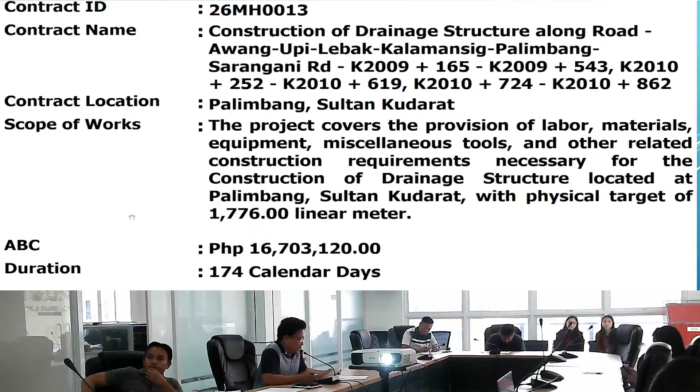So we have 8 civil works projects for this pre-bid conference. For the first project, the contract ID number 26MH0013, construction of drainage structure along road Awang Upi Lebak Kalamansig Palimbang Sarangani Road, with an ABC of 16,703,120 pesos.

The next is contract ID 26MH0032, widening of bridge Wal Br 1 along Awang Upi Lebak Kalamansig Palimbang Sarangani Road, location Palimbang, Sultan Kudarat, with an ABC of 14,108,080 pesos.

And the next is contract ID 26MH0034, construction of concrete road Basak Villamonte Capilan connecting to New Calinog in support of the bamboo and coffee plantation, location Lebak, Sultan Kudarat, with an ABC of 27,881,980 pesos.

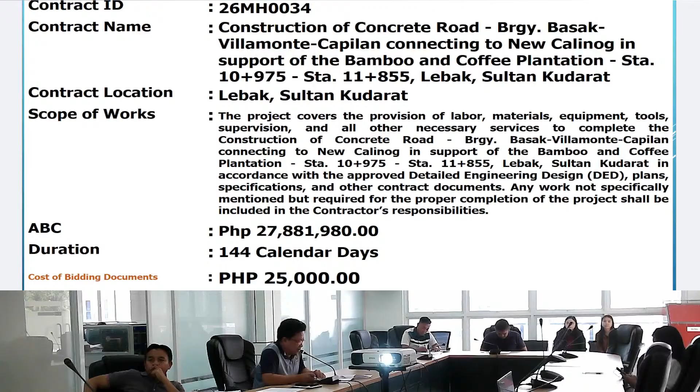For the next project is 26MH0070, rehabilitation of multipurpose building, Esperanza National High School, Barangay Poblacion, Esperanza, Sultan Kudarat. Location, Esperanza, Sultan Kudarat, with an ABC of 4,950,000 pesos.

And the next is contract ID 26MH0089, construction or completion of multipurpose building, Barangay Salansang, Lebak, Sultan Kudarat. Location, Lebak, Sultan Kudarat, with an ABC of 2,970,000 pesos.

And for the next project is contract ID 26MH0091, construction completion phase 2 of multipurpose building, Barangay Sison, Bagumbayan, Sultan Kudarat. Location, Bagumbayan, Sultan Kudarat, with an ABC of 1,980,000 pesos.

And the next project is contract ID 26MH0104, construction of multipurpose building, Barangay Kraan, Palimbang, Sultan Kudarat. Location, Palimbang, Sultan Kudarat, with an ABC of 4,950,000 pesos.

And the last project is contract ID 26MH0107, construction of multipurpose building, Barangay Malatunol, Palimbang, Sultan Kudarat. Location, Palimbang, with an ABC of 4,950,000 pesos.

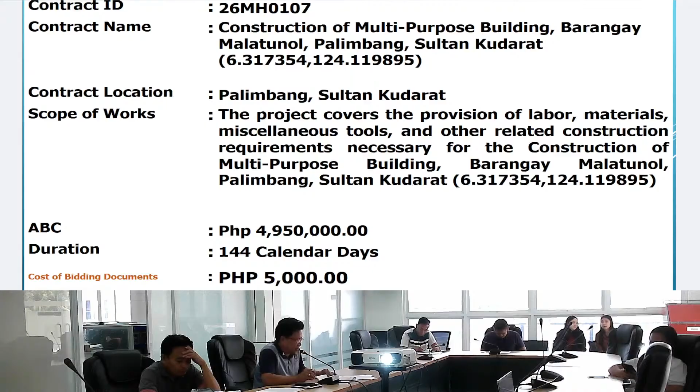So now I will give the floor to our planning engineers for the contract data as well as the discussion of plans.

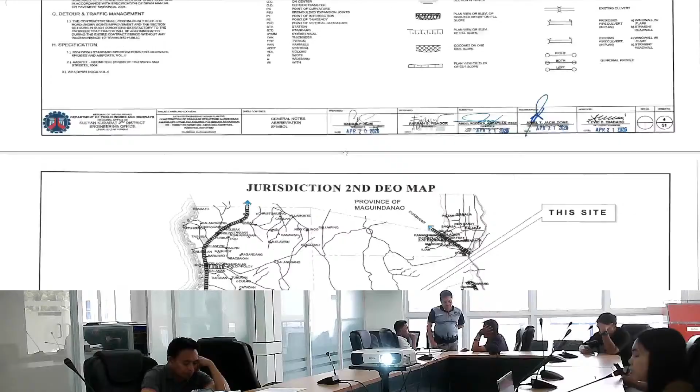For the summary of quantities: clearing and grubbing, we have 3.56 hectares. For the individual removal of trees with 150 to 300 millimeters diameter small, we have 7 each. For 301 to 500 millimeters diameter small, we have 4 each. For the removal of structures or obstruction concrete, we have 117 cubic meters.

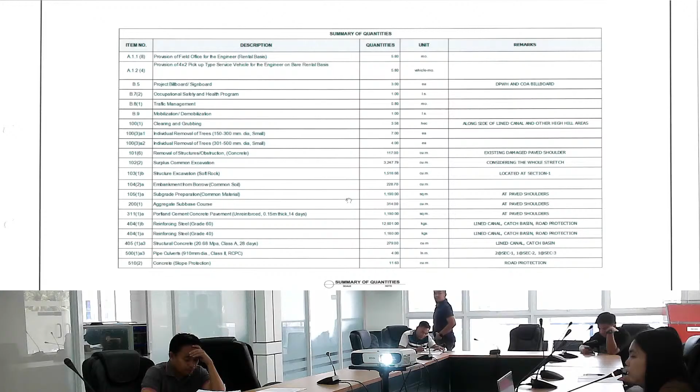For the surplus common excavation, we have 3,247.79 cubic meters. For the structure excavation of soft rock, we have 1,516.66 cubic meters. For the embankment from borrow common soil, we have 228.70 cubic meters. For the subgrade preparation of common materials, we have 1,190 square meters. For the aggregate subbase course, we have 314 cubic meters.

For the Portland cement concrete of 0.15 meters thick, we have 1,190 square meters. For the reinforcing steel grade 60, we have 12,601 kilograms. For grade 40, we have 1,160 kilograms. For the structural concrete, we have 279 cubic meters. For the pipe culverts of 910 millimeters diameter, we have 4 linear meters. For the concrete for slope protection, we have 11.63 cubic meters.

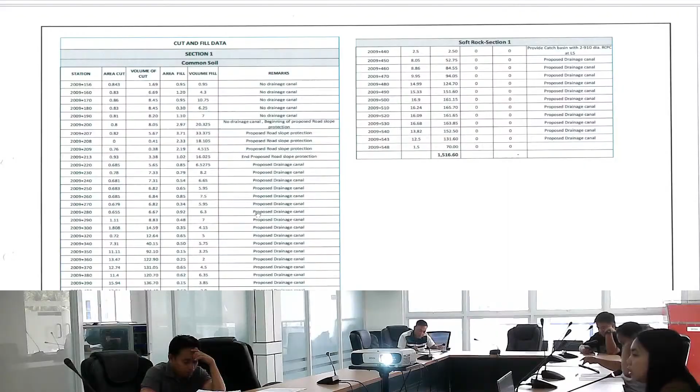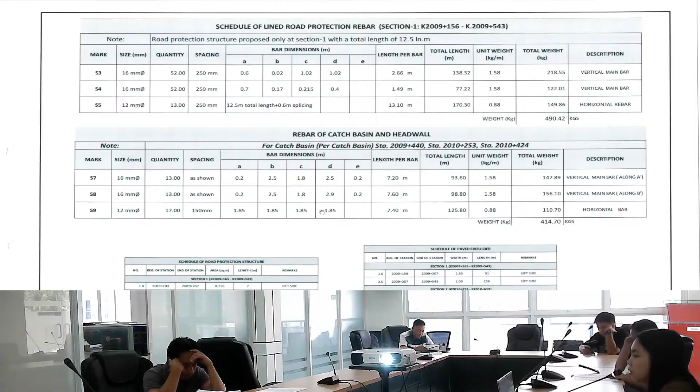So we have here the cut and fill data for section 1 and the soft rock section 1. Here, the data for section 2 and section 3. So we have here the schedule of lined canal reinforcement bar for section 1, here is for section 2 and for section 3. Here is the schedule of lined road protection rebar for section 1. Then here is the rebar of catch basin and head wall.

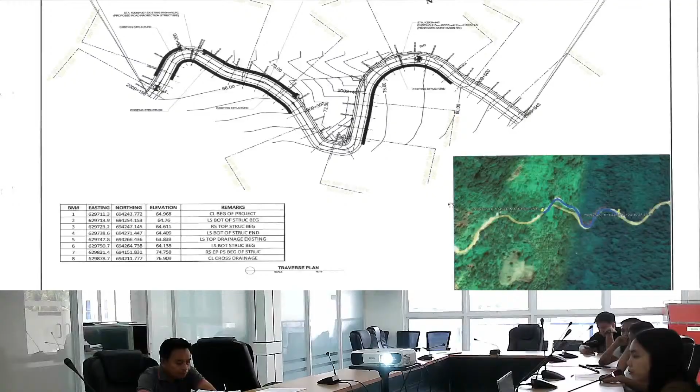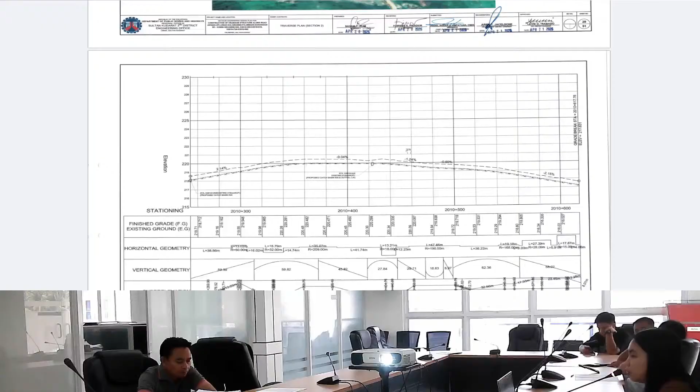We have here the traverse plan, the project profile for section 1, the cross sections, here is the traverse plan for section 2, and then the project profile for section 2, the cross sections. And then the traverse plan for section 3, the project profile for section 3, the cross sections for section 3.

And then the construction traffic warnings, and then the DPWH tarpaulin.

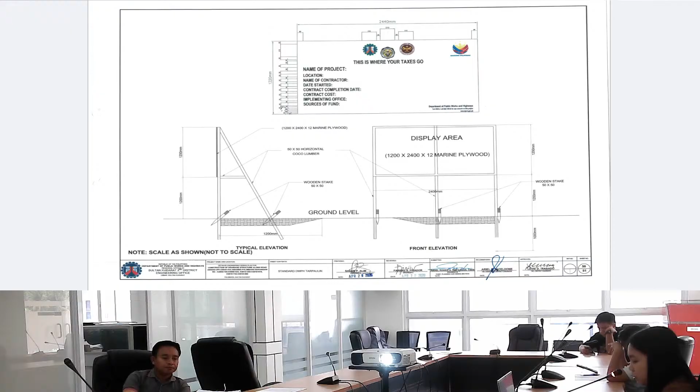So the next is with the contract ID number 26MH0032, the name of contract Widening of Bridge, Wal Bridge 1, B00336MN, along Awang Upi, Libak, Calamansig, Palimbang, Sarangani Road, located at Palimbang, Sultan Kudarat. So with the scope of works, the project covers the provision of labor, materials, equipment, miscellaneous tools, and other related construction requirements necessary for the widening of bridge, Wal Bridge 1, B00336MN, along Awang Upi, Libak, Calamansig, Palimbang, Sarangani Road, with a physical target of 0.01235 kilometers. So the ABC for this project is 14,108,080 pesos with a contract duration of 179 calendar days.

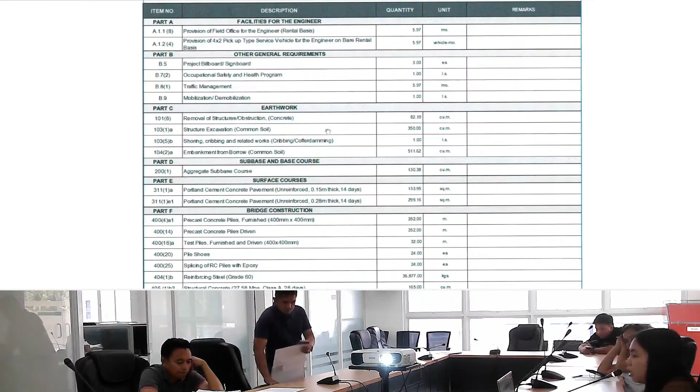So we have here the index of sheet, the summary of quantities. So for the removal of structures or obstruction for concrete, we have 82.19 cubic meters. For the structure excavation of common soil, we have 350 cubic meters.

For the shoring, cribbing, and related works, we have one lump sum. For the embankment from borrow common soil, we have 511.62 cubic meters. For the aggregate sub-base course, we have 130.38 cubic meters. For the Portland cement pavement of 0.15 meters thick, we have 133.95 square meters. For the Portland cement concrete pavement of 0.28 meters thick, we have 299.16 square meters.

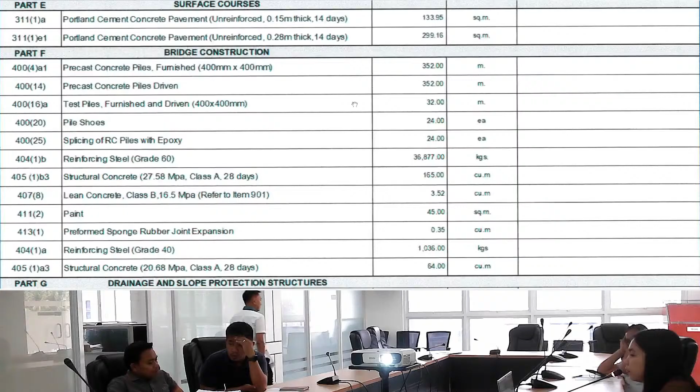For the precast concrete piles furnished, we have 352 meters. For the precast concrete piles driven, we have 352 meters. For the test piles furnished and driven, we have 32 meters. For the pile shoes, we have 24 each. For the splicing of RC piles with epoxy, we have 24 each.

For the reinforcing steel grade 60, we have 36,877 kilograms. For the structural concrete, we have 165 cubic meters. For the lean concrete, we have 3.52 cubic meters. For the paint, we have 45 square meters. For the preformed sponge rubber joint expansion, we have 0.35 cubic meters.

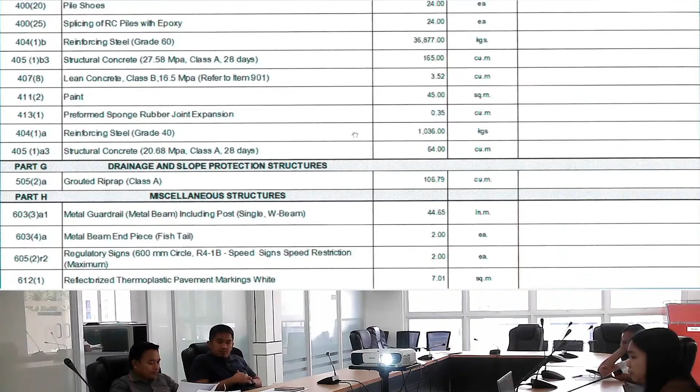For the reinforcing steel grade 40, we have 1,036 kilograms. For the structural concrete, we have 64 cubic meters. For the grouted riprap, we have 106.79 cubic meters. For the metal guardrail, we have 44.65 linear meters. For the metal beam end piece fishtail, we have 2 each. For the regulatory signs, 600 mm circle, speed sign, speed restriction maximum, we have 2 each. For the reflectorized thermoplastic pavement markings white, we have 7.01 square meters.

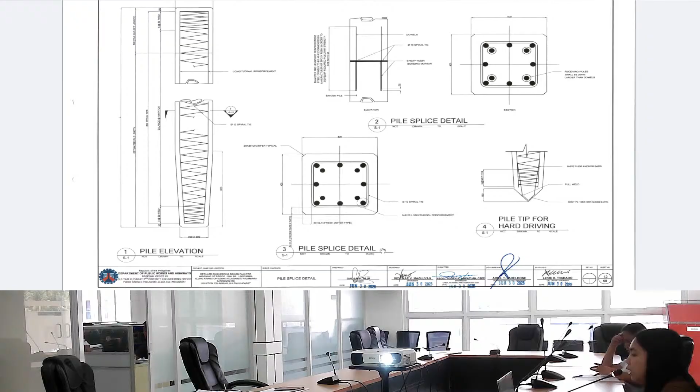Then the pile elevation, the pile splice detail, the pile splice, another pile splice detail, and then the pile tip for hard driving.

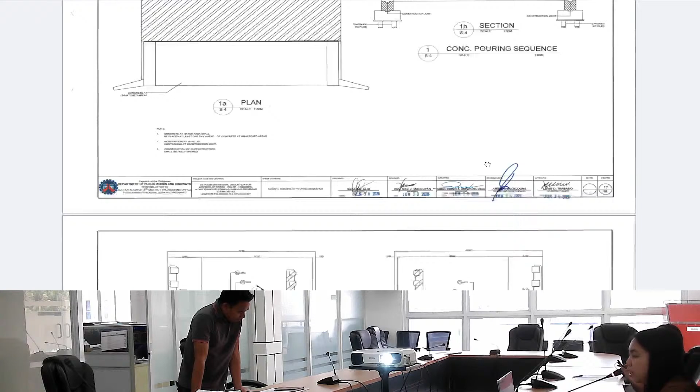So we have here the plan, the section, and the concrete pouring sequence. We have here the intermediate diaphragm detail.

So here's the elevation, the section. We have here the camber diagram.

Then we have here the girder elevation and the bottom bar schematic layout. Here is the section at mid-span and then the detail.

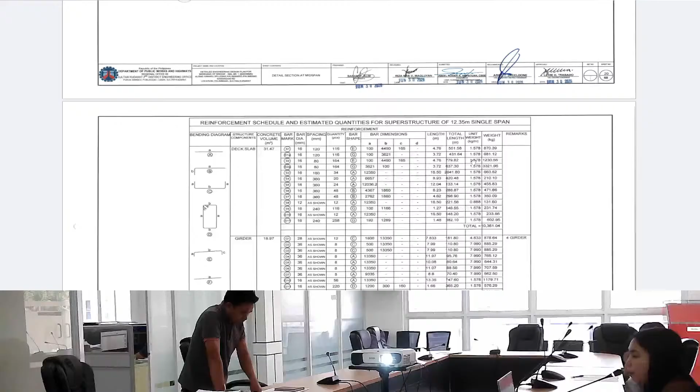So we have here the reinforcement schedule and estimated quantities for the superstructure of 12.35 meter single span.

We have here the half showing reinforcement, then the dimension, its elevation, the wing wall elevation, its sections.

Here is the reinforcement schedule and estimated quantities for the abutment, its plan and elevation. Here's the parapet joint and the deflection joint.

We have here the railing details. So here is the section. And then the reinforcement schedule and estimated quantities for the railings.

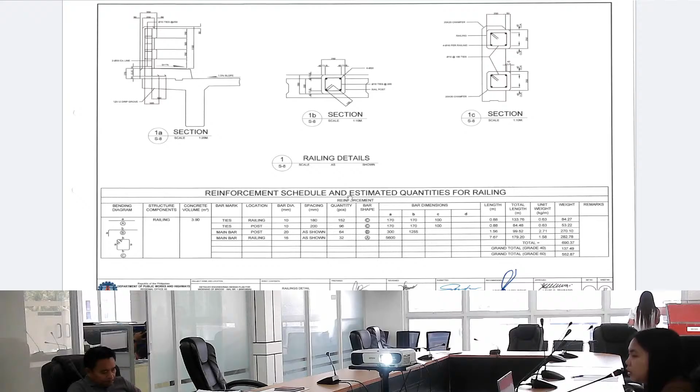Here is the typical drain details, the sidewalk detail, the section, and the plan.

Here is the reinforcement schedule and estimated quantities for approach slab. The plan for the abutment protection.

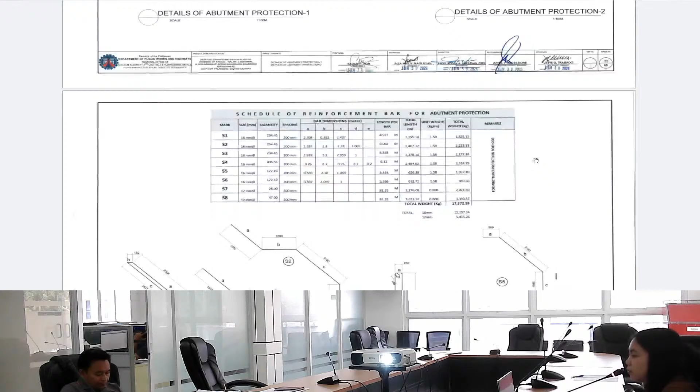Here's the detail of abutment protection 1 and the details of abutment protection 2. We have here the schedule of reinforcement bar for abutment protection. And then here is the bar bending diagram of abutment protection.

We have here the general plans, standard painting on railing, sidewalk, and wing wall. Here's the plan and its rear elevation.

So we have here the front elevation and the text detail. So we have here the note: when facing the black and white stripe painting, it should be in this orientation.

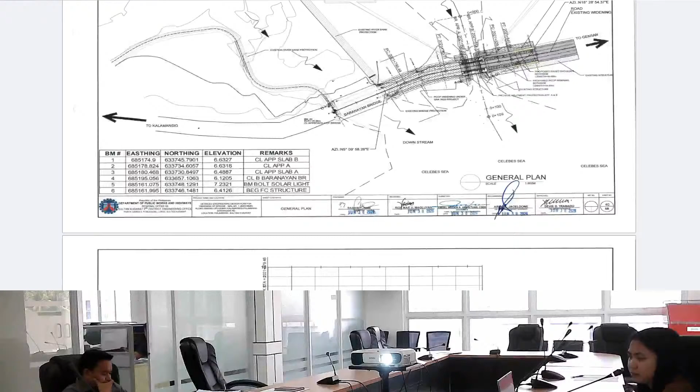So we have here the boring log, the general plan, the general profile, the cross sections. Here's the river profile, its stations.

So here is the typical roadway section, the grouted riprap typical section, and the detail of weep holes. Here's the detail of reinforced concrete RC pedestal.

So we have here the detail of integrated solar street lights, the fixed connection, the detail of projection, pipe connection. So we have here the detail of flex beam guardrail.

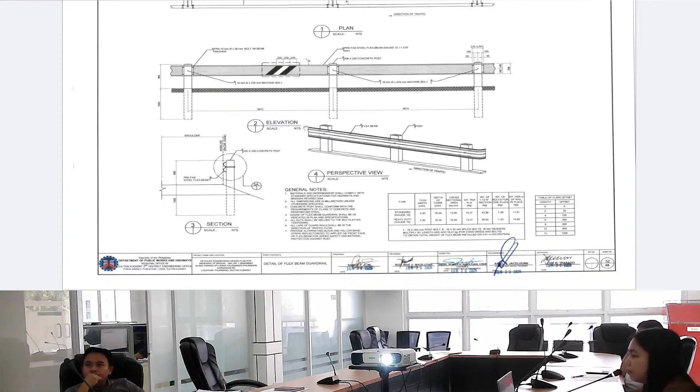Here's the plan, the elevation, its section, and the perspective view of the beam guardrail. We have here the detail of flex beam guardrail.

The flex beam and detail, its sections, then the guardrail set out standard installation for end terminal.

Then here we have the typical sign detail, so the installation details type A, and then the installation details for type B.

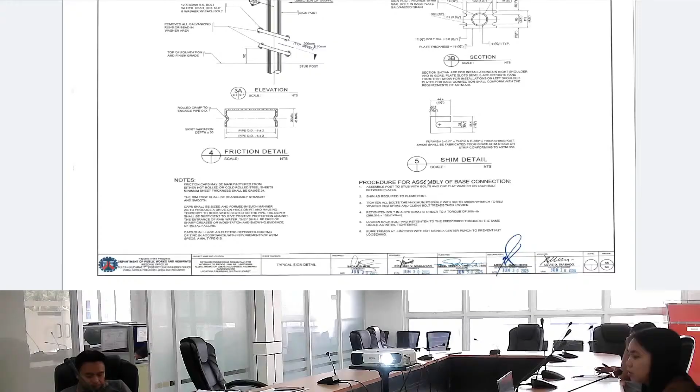So we have here the typical sign detail, its elevation, the friction detail, and then the shim detail.

So for the notes: friction caps may be manufactured from either hot rolled or cold rolled steel sheets. Minimum sheet thickness shall be gauge 24. The rim edge shall be reasonably straight and smooth.

Cap shall be sized and formed in such manner as to produce a drive on friction fit and have no tendency to rock when seated on the pipe.

The depth shall be sufficient to give positive protection against the entrance of rainwater. They shall be free of sharp creases or indentation and show no evidence of metal failure. Cap shall have an electro-deposited coating of zinc in accordance with requirements of ASTM specs A164 type G.S.

So here we have the pavement marking details, the no passing lines on horizontal curves.

So we have here the standard plan for PCCP 0.28 meter thick and 6.7 meters wide.

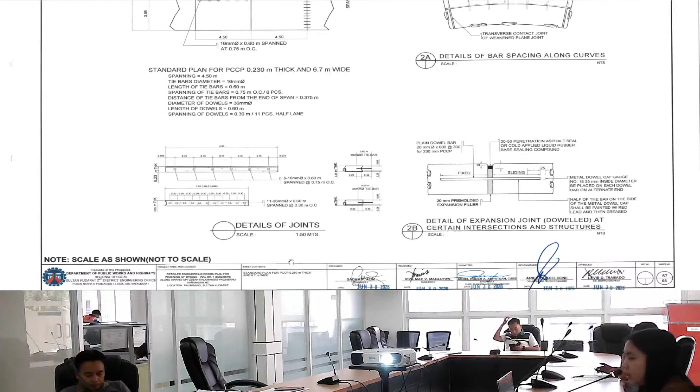So we have here the traffic management plan, the construction traffic warnings, then the standard DPWH tarpaulin.

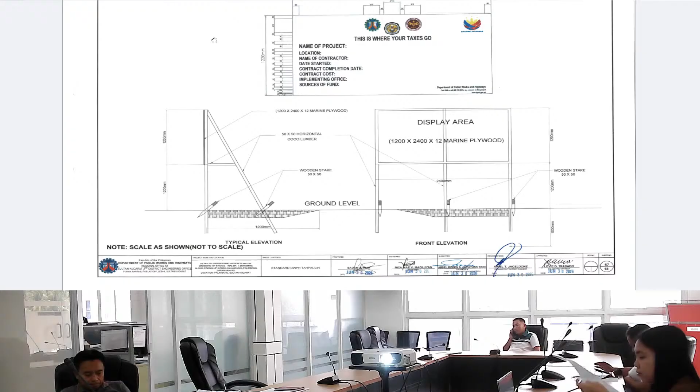So the next is with the contract ID number of 26MH0034, with the name of contract: construction of concrete road, Barangay Basak, Villamonte, Kapilan connecting to New Calinog, in support of the bamboo and coffee plantations. Station 10 plus 975 to Station 11 plus 855, Lebak, Sultan Kudarat, located at Lebak, Sultan Kudarat.

For the scope of works, the project covers the provision of labor, materials, equipment, tools, supervision, and all other necessary services to complete the construction of concrete road, Barangay Basak, Villamonte, Kapilan connecting to New Calinog, in support of the bamboo and coffee plantation, Station 10 plus 975 to Station 11 plus 855, Lebak, Sultan Kudarat, in accordance with the approved detailed engineering design, plans, specifications, and other contract documents. Any work not specifically mentioned but required for the proper completion of the project shall be included in the contractor's responsibilities.

So the ABC for this project is 27,881,980 with 144 calendar days. So we have here the physical target of 1.76 lane kilometers.

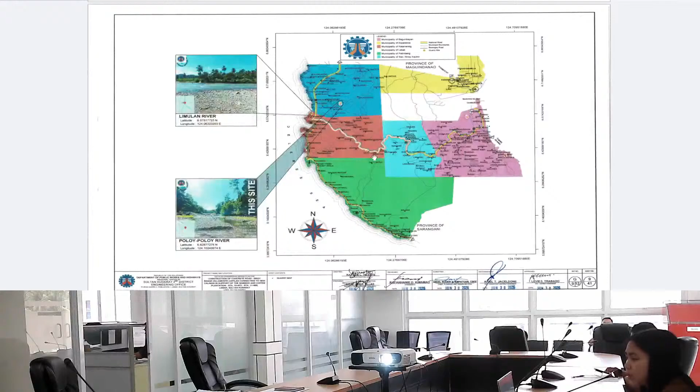So we have here the index of drawings, the location plan, the vicinity map, and the key map. We have here the general notes, legends, symbols, and abbreviations, other general notes. We have here the quarry map.

So for the summary of quantities, for the clearing and grubbing, we have 0.88 hectares, individual removal of trees with 150 to 300 diameter small, we have 30 each. For the individual of trees, 301 to 500 diameter small, we have 3 each. For the removal of actual structures or obstruction, PCCP reinforced with 0.15 meter thick, we have 12 square meters.

For the surplus common excavation, we have 10,181.94 cubic meters. For the embankment from borrow common soil, we have 2,173.40 cubic meters. For the subgrade preparation of common material, we have 6,248 square meters.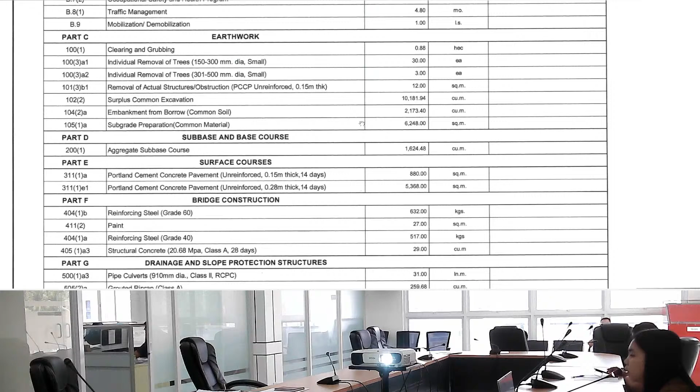For the aggregate sub-base course, we have 1,624.48 cubic meters. For the Portland cement concrete pavement, unreinforced 0.15 meter thick, we have 880 square meters. For the Portland cement concrete pavement with 0.28 meter thick, we have 5,368 square meters. For the reinforcing steel grade 60, we have 632 kilograms.

For the paint, we have 27 square meters. For reinforcing steel grade 40, we have 517 kilograms. For structural concrete, we have 29 cubic meters. For pipe culverts with 910 diameter, we have 31 linear meters. For the grouted riprap, we have 259.68 cubic meters.

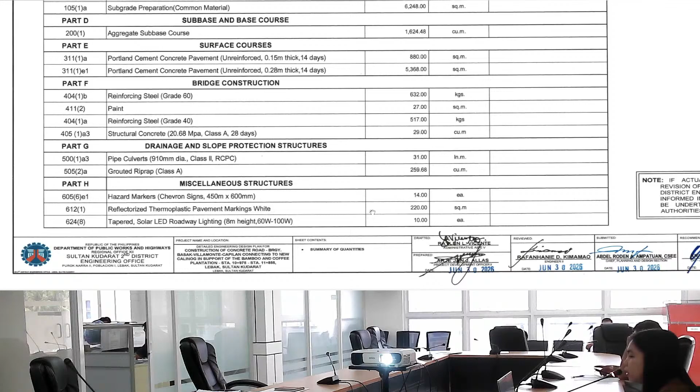For the hazard marker chevron signs, we have 14 each. For the reflectorized thermoplastic pavement markings white, we have 220 square meters. For the tapered solar LED roadway lighting, we have 10 each.

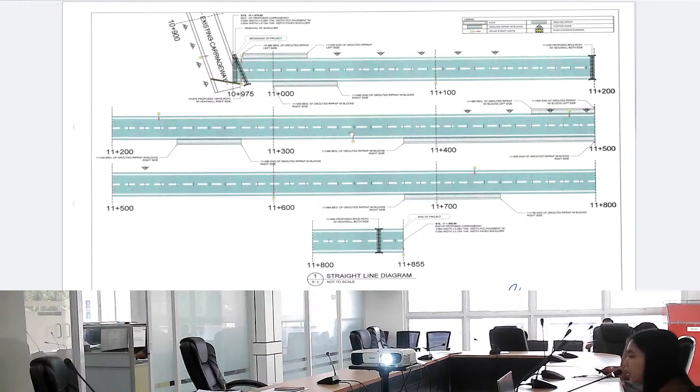We have here the typical roadway section, the traverse plan, the center line profile. We have here the typical plan of two-lane pavement, the detail of concrete slab, its sections, the detail of joints and rigid pavement, the longitudinal construction or contact joint, butt transverse construction or contact joint, weakened plane joint used in half width construction, and the detail of ramp approach.

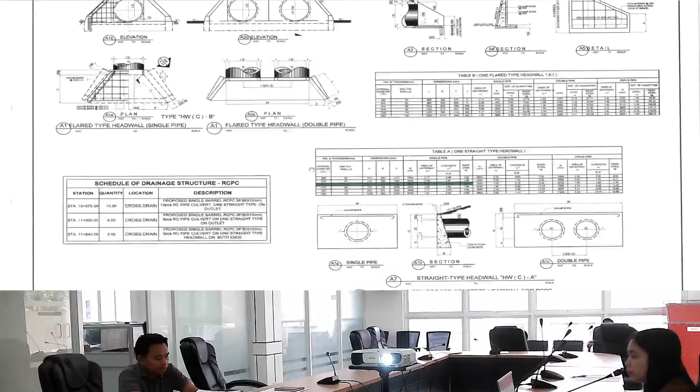We have here the widening on horizontal simple curve, vertical curve, straight line circular curve case 1 and 2, and the horizontal curve. We have here the standard reinforced concrete head wall or RCPC, its elevation, the flared type head wall, single pipe, flared type head wall, double pipe, its section and details.

We have here the detail of reinforced concrete pipe culvert. We have here the detail of road concrete barrier. The detail of grouted riprap, its cross sections, and the quantity of materials per meter. A schedule of 1.5 meter height grouted riprap with blocks. Then here we have the cross sections.

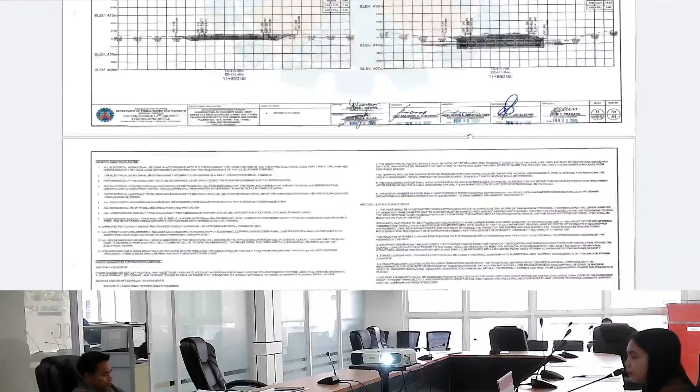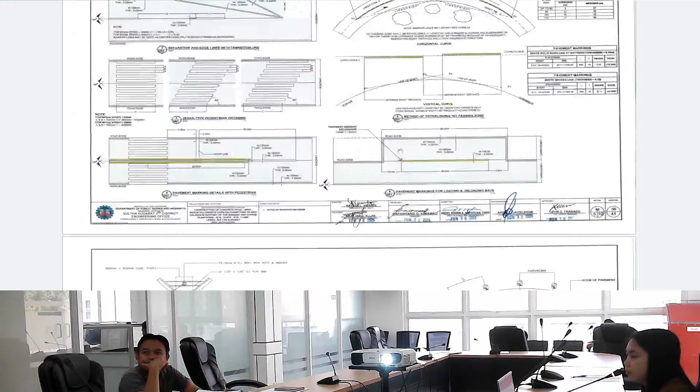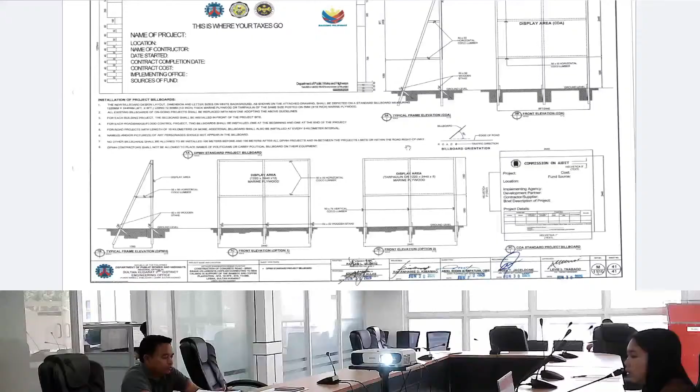And here we have the detail of pavement markings. Then we have here the traffic sign post footing detail, then the chevron sign detail, the hazard marker type HM, the W series symbol. Here we have the traffic management plan. And the DPWH standard project billboard.

Next is with the contract ID number of 26MH007T with the name of contract: rehabilitation of multipurpose building, Gymnasium Esperanza National High School, 304589 Barangay Poblacion, Esperanza, Sultan Kudarat, located at Esperanza, Sultan Kudarat.

For the scope of works, the project covers the provision of labor, materials, equipment, miscellaneous tools, and other related construction requirements necessary for the rehabilitation of multipurpose building, Gymnasium Esperanza National High School, 304589 Barangay Poblacion, Esperanza, Sultan Kudarat, with the approved budget for the contract of 4,950,000, with a contract duration of 144 calendar days.

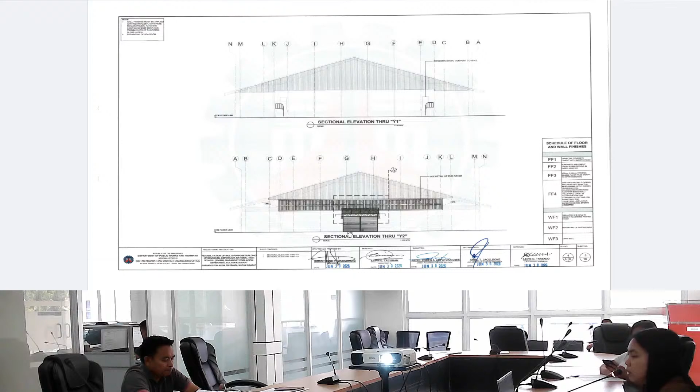Here's the sectional elevation through Y1 and the sectional elevation through Y2. So here we have the sectional elevation through X1 and the sectional elevation through X2.

So here we have the platform section details. Here's the plan, the platform frame detail, the front, the section A, section B, and the side view.

So here is the detail for girt 1 unit, and the girt 2 1 unit. For the strut, we have 5 units. So we have here the schedule of doors and windows, the ceiling joist detail, and the ceiling layout plan.

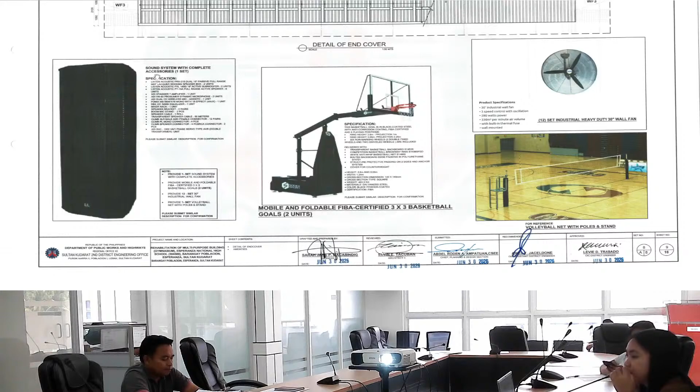So here we have the detail of end cover, and this project for the notes, we have sound system with complete accessories, one set.

For the specification, we have here the note, provide one set sound system with complete accessories. Provide mobile and foldable FIBA certified 3x3 basketball goals, 2 units. Provide 12 sets of 30-inch industrial wall fan. Provide one set volleyball net with poles and stand.

So here is the mobile and foldable FIBA certified 3x3 basketball goals, 2 units. And the volleyball net with poles and stand. Here is the specifications of the wall fan.

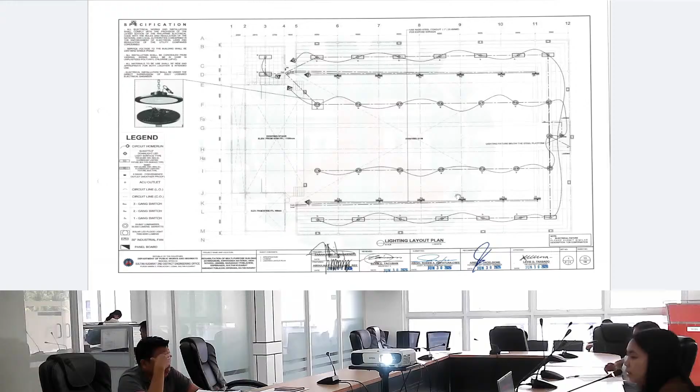And here is the lighting layout plan, the power layout plan, the single line diagram, the PB or panel board, the distribution panel board for reference, and the fire extinguisher layout plan, the geohazard map.

For the summary of quantities, for the structural concrete, we have 40.03 cubic meters. For the formworks and poles work, we have 120 square meters. For the CHB non-load bearing, we have 1.89 square meters. For the carpentry and joinery works, we have 1 lump sum.

For the finishing hardware, we have 1 lump sum. For the aluminum frame glass door, we have 3.36 square meters. For the aluminum glass window sliding type, we have 2.88 square meters. For the roll-up door, we have 1 set. For the doors wood panel, we have 1.89 square meters.

For the ceiling, we have 39.36 square meters. For the glazed tiles and trims, we have 37.90 square meters. For the cement plaster finish, we have 3.78 square meters.

For the painting works for masonry and concrete, we have 920.64 square meters. For the painting works for wood, we have 3.17 square meters. For the painting works steel, we have 1,978.91 square meters. For the pre-painted metal sheets, we have 50 square meters.

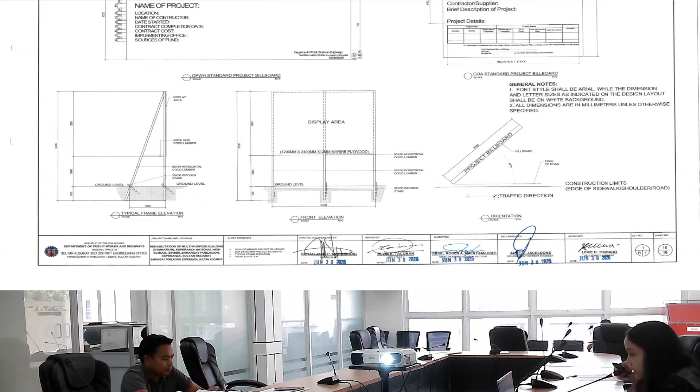The approved budget for the contract is 2,970,000 pesos, and the contract duration is 110 calendar days.

So here's the detailed engineering design plan for this project. We have the geotag photo, exterior perspective, and the location map. Next is the floor plan, the right side elevation, and front elevation.

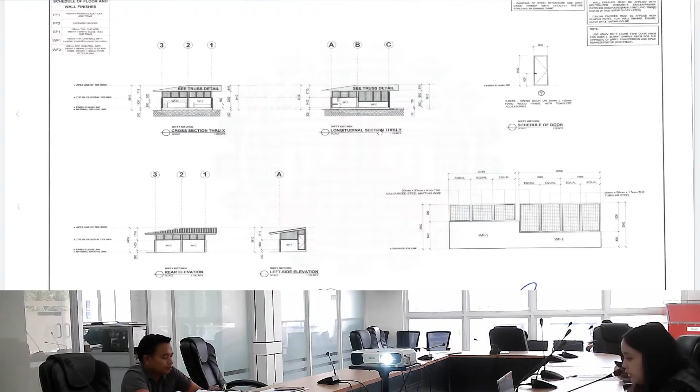Next, we have the cross-section through X, the longitudinal section through Y, the schedule of door, rear elevation, and left side elevation. Next is the reflected ceiling plan and roof plan for the existing building.

Here's the isometric view, tek screw spacing, roof panel side lap detail blow up, roofing fixer.

The furnitures for reference, we have dining table, solid hardwood, 1 set, and the dimension for 6-seater. Next, we have mobile pedestal recessed handle, 22 sets, L-shaped sofa, 2 sets, heavy-duty monoblock chair, we have 13 sets.

Next is the general notes. Another general notes.

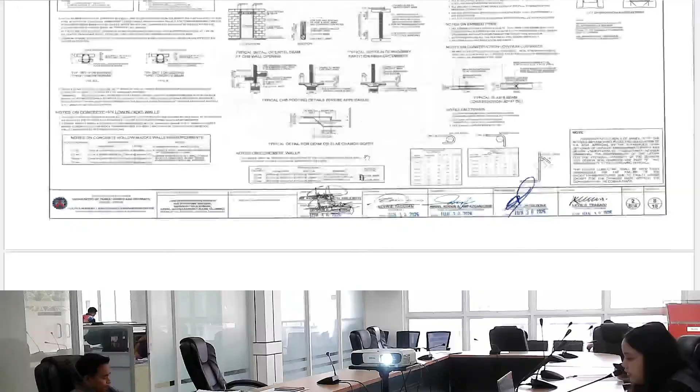We have the foundation layout plan, the detail of stair on fill, the wall footing detail, the section, and plan for F1C1.

Next is the roof framing plan, the detail of rafter truss. We have 1 and 2, and the detail of gutter, detail of splice for L bars and purlins, C purlins.

Next, we have the water layout plan, the storm drainage layout plan, the catch basin detail, the plan and its cross section.

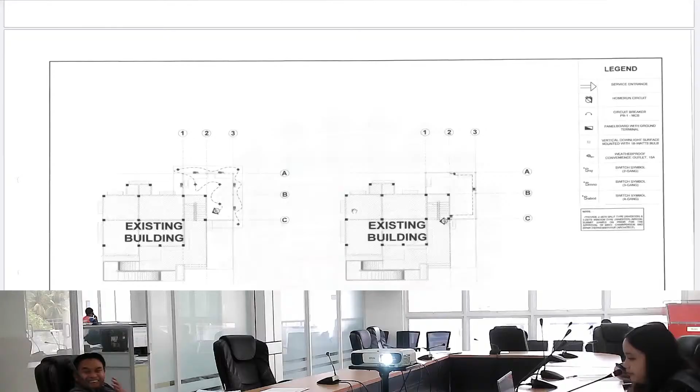Next, the isometric view for water layout plan, water line layout plan, and storm drainage layout plan. Next is the lighting layout plan and power layout plan for dirty kitchen.

Here is the electrical riser diagram for the panel board, the load schedule for the panel board, the receptacle outlet wall mounting detail, recess type for reference, the one-line diagram, and general notes. For reference, we have 5 sets of solar LED floodlights, 7,000 to 8,000 lumens, and 6 sets of 4-inch diameter surface-mounted 18-watt downlights.

Next, we have the emergency layout plan, the fire extinguisher detail, and the general notes. For reference, we have 1 set of emergency light.

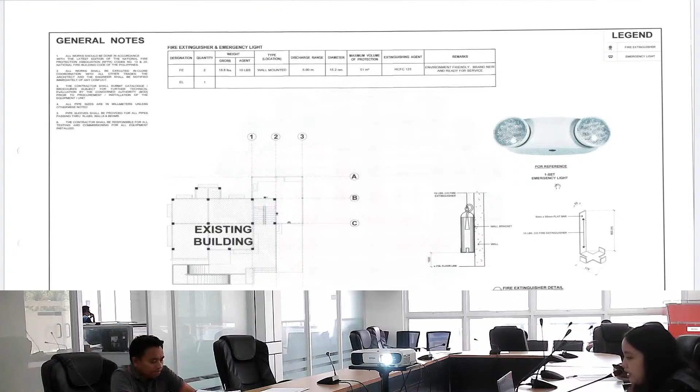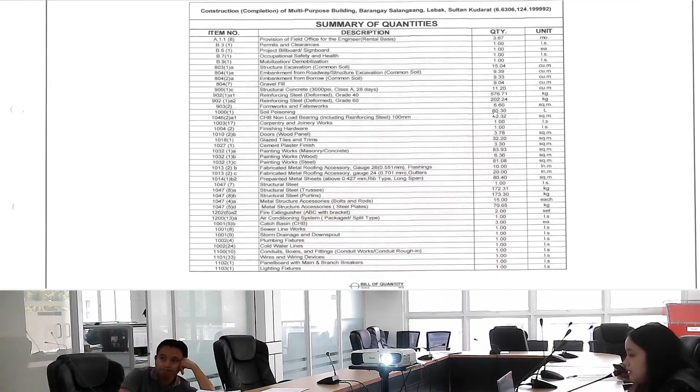Soil poisoning, 60.30 liters. CHB non-load bearing, 100 millimeters, 40.32 square meters. Carpentry and joinery works, 1 lump sum. Finishing hardware, 1 lump sum. Doors for wood panel, 3.78 square meters. Glaze tiles and trims, 32.20 square meters.

Cement plaster finish, 3.30 square meters. Painting works for masonry or concrete, 83.93 square meters. Painting works for wood, 6.36 square meters. Painting works for steel, 81.08 square meters. Fabricated metal roofing accessory for flashings, 10 linear meters. For gutters, 20 linear meters. For pre-painted metal sheets, rib type, 80.40 square meters.

Structural steel, 1 lump sum. For trusses, 172.31 kilograms. For purlins, 173.30 kilograms. For bolts and rods, 15 each. Steel plates, 70.65 kilograms. Fire extinguisher, 2 sets. Air conditioning system, 1 lump sum. Catch basin, 3 each. Sewer line, 1 lump sum. Storm drainage and downspout, 1 lump sum.

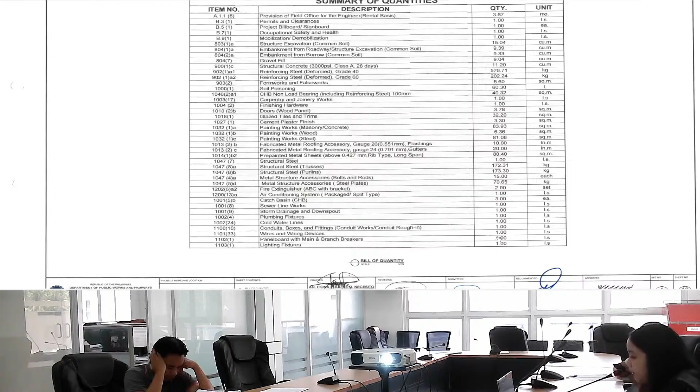Plumbing fixtures, 1 lump sum. Cold water lines, 1 lump sum. Conduits, boxes, and fittings, 1 lump sum. Wires and wiring devices, 1 lump sum. Panel board with main and branch breakers, 1 lump sum. And lighting fixtures, 1 lump sum.

Next, we have the geohazard map and DPWH standard project billboard.

For the next project, we have a contract ID of 26MH0091. The name of the contract is Construction Completion, Phase 2 of Multi-Purpose Building, Barangay Sison, Bagumbayan, Sultan Kudarat, with coordinates of 6.550668 to 124.585553. The project location is Bagumbayan, Sultan Kudarat. Scope of works: the project covers the provision of labor, materials, equipment, miscellaneous tools, and other related construction requirements necessary for the construction completion of Phase 2 of the Multi-Purpose Building, Barangay Sison, Bagumbayan, Sultan Kudarat. The approved budget for the contract is 1,980,000 pesos, and the contract duration is 105 calendar days.

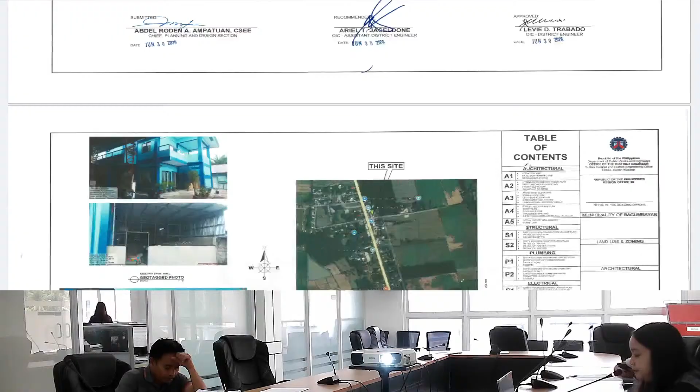So here is the detailed engineering design plan for this project. We have the geotag photo, exterior perspective, the location map. Next, we have the existing floor plan for the existing gymnasium, and the floor plan for the existing storage, and the schedule of door and front elevation.

Next, we have the left side elevation and longitudinal section through Y, right side elevation, rear elevation, and cross section through X for the dirty kitchen. Note: wall finishes must be applied with neutralizer, concrete sealer or primer, patching compound, skim coat, and 2 coats of paint.

Next, we have the reflected ceiling plan and roof plan for the dirty kitchen, as well as the roofing fixture, texture spacing, and roof panel side lap detail blow-up.

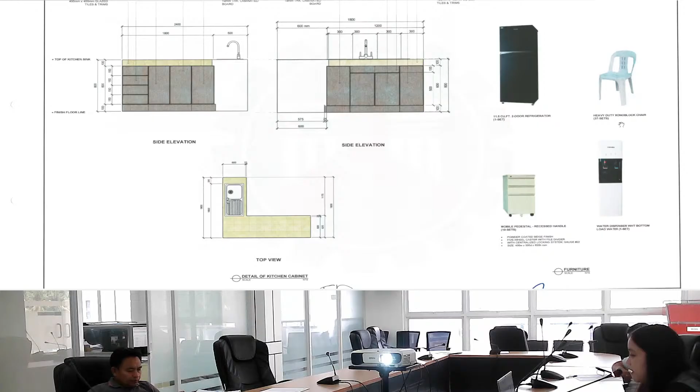Here is the detail of the kitchen cabinet, its side elevation, top view, and for reference we have: 11.5 cubic feet, 2-door refrigerator, 1 set; heavy-duty monoblock chair, 37 sets; mobile pedestal recessed handle, 10 sets; water dispenser with bottom load water, 1 set, for furnitures.

Next, we have the foundation layout plan, the wall footing details, the section, and its plans for F1C1.

Next, the roof framing plan and the detail of splice for C-purlins and L-bars, and detail of rafter truss. Note: painting of steel structure, use gray oxide primer with catalyst before applying enamel paint.

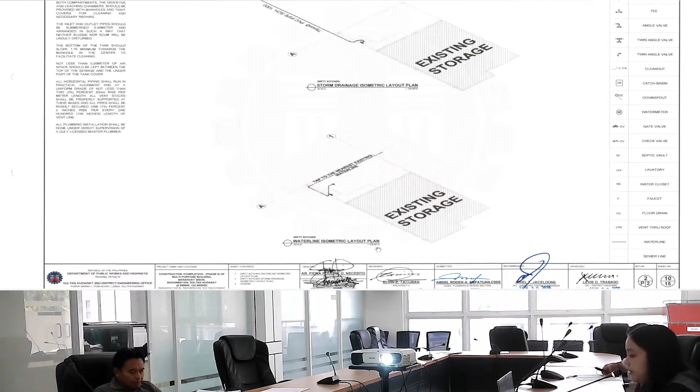Next, we have the waterline layout plan, the storm drainage layout plan, and next is the isometric view of the water layout plan and storm drainage layout plan.

Next, we have the lighting layout plan and power layout plan for the dirty kitchen. For reference, we have 4 sets of 4-inch diameter surface-mounted 18-watt downlights and 10 sets of solar LED floodlights, 7,000 to 8,000 lumens.

Here is the fire extinguisher detail and its schedule, as well as the emergency layout plan.

For the summary of quantities: structure excavation, 4.14 cubic meters. Embankment from roadway or structure excavation, common soil, 3.16 cubic meters. Embankment from borrow for common soil, 8.32 cubic meters.

The gravel fill: 7.49 cubic meters. Structural concrete 3,000 psi: 7.38 cubic meters. Reinforcing steel grade 40: 302.33 kilograms. Reinforcing steel grade 60: 49.93 kilograms. Formworks and falseworks: 2.7 square meters. Soil poisoning: 22.61 liters. CHB non-load bearing 100 millimeters: 3.60 square meters. Carpentry and joinery works: 1 lump sum. Finishing hardware: 1 lump sum. Glazed tiles and trims: 8.4 square meters. Cement plaster finish: 7.2 square meters. Painting works for masonry: 725 square meters. Painting works for steel: 483.04 square meters.

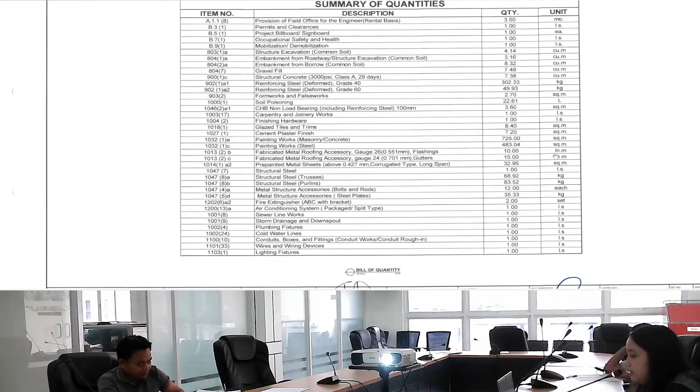For flashings, 10 linear meters. Gutters, 15 linear meters. Pre-painted metal sheets, corrugated type, 32.95 square meters. Structural steel, 1 lump sum. Structural steel trusses, 68.92 kilograms. For purlins, 83.52 kilograms. For bolts and rods, 12 each. For steel plates, 35.33 kilograms.

For fire extinguisher, we have 2 sets. Air conditioning system: 1 lump sum. Sewer line works: 1 lump sum. Storm drainage and downspout: 1 lump sum. Plumbing fixture: 1 lump sum. Cold water lines: 1 lump sum. Conduits, boxes and fittings: 1 lump sum. Wires and wiring devices: 1 lump sum. Lighting fixtures: 1 lump sum.

And here is the geohazard map for the Municipality of Bagumbayan, and the DPWH standard project billboard.

For the next project, we have a contract ID of 26MH0104, with the contract name of Construction of Multi-Purpose Building, Barangay Kraan, Palimbang, Sultan Kudarat, with coordinates of 6.119145 to 124.34441. The project location is Palimbang, Sultan Kudarat.

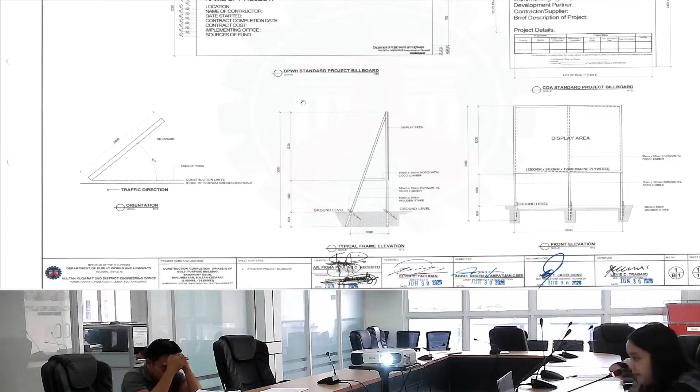All concrete pedestal, AG-304 Deep Forest painted finish.

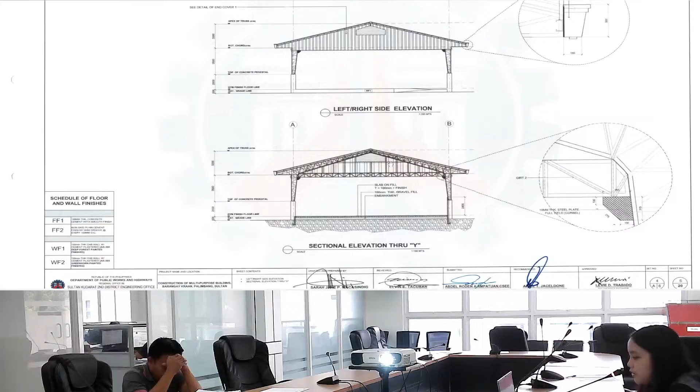Next, we have the front elevation and the rear elevation. The left or right side elevation. The sectional elevation through Y. The details of girt and gutter.

Next, we have the foundation plan. The detail of wall footing, the detail of base plate, and detail of F1C1.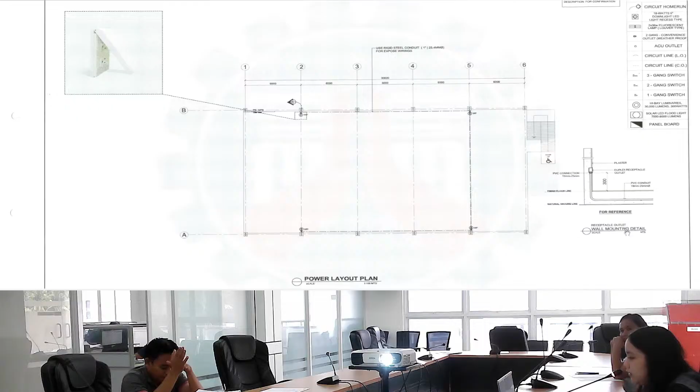Next, we have the single line diagram, the panel board diagram, and the panel board or DPB for reference and its specifications.

Next, we have the general note and specifications, hybrid inverter specifications, solar panel specifications, for block diagram and PV electrical design analysis. And here's the units or abbreviations for reference.

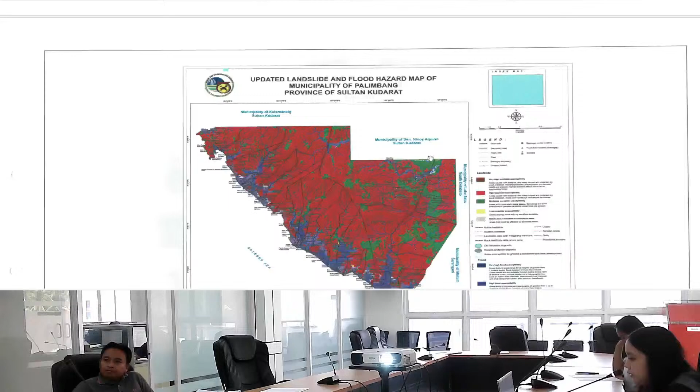Next, we have the fire extinguisher layout plan and the schedule of the fire extinguisher, as well as its detail and general notes. Next, we have the geohazard map for the Municipality of Palimbang.

For summary of quantities: structure excavation for common soil, 71.40 cubic meters. Embankment from roadway or structure excavation, 47.86 cubic meters. Embankment from borrow, common soil, 123.21 cubic meters. Gravel fill, 55.50 cubic meters. Structural concrete 3000 psi, 73.36 cubic meters. Reinforcing steel grade 40,

1,760.42 kilograms. Reinforcing steel grade 60, 1,443.96 kilograms. Formworks and falseworks, 81.78 square meters. CHB non-load bearing 100 millimeters, 75.78 square meters. Carpentry and joinery works,

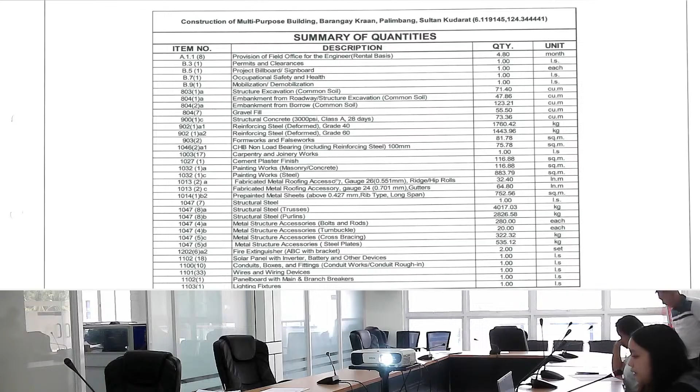1 lump sum. Cement plaster finish, 116.88 square meters. Painting works for masonry or concrete, 116.88 square meters. Painting works for steel, 883.79 square meters. For ridge or hip rolls, 32.40 linear meters. For gutters, 64.80 linear meters.

For pre-painted metal sheets, rib type, 752.56 square meters. For structural steel, 1 lump sum.

Trusses, 4,017.03 kilograms. Purlins, 2,826.58 kilograms. Bolts and rods, 280 each. Turnbuckle, 20 each. Cross bracing, 322.32 kilograms. Steel plates,

535.12 kilograms. Fire extinguisher, 2 sets. Solar panel with inverter, battery and other devices, 1 lump sum. Conduits, boxes and fittings, 1 lump sum. Wires and wiring devices, 1 lump sum. Panel board with main and branch breakers, 1 lump sum. And lighting fixtures, 1 lump sum.

And here is the DPWH and COA standard project billboard.

For the last project, we have contract ID 26MH0107. The name of the contract is Construction of Multipurpose Building, Barangay Malatunol, Palimbang, Sultan Kudarat, with coordinates 6.317354 to 124.119895. The project location is Palimbang, Sultan Kudarat. Scope of works: the project covers the provision of labor, materials, miscellaneous tools, and other related construction requirements necessary for the construction of the multipurpose building, Barangay Malatunol, Palimbang, Sultan Kudarat. The approved budget for the contract is 4,950,000 pesos. The contract duration is 144 calendar days.

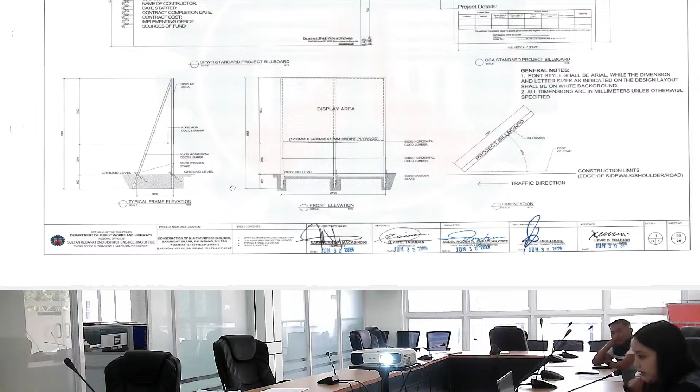So here is the detailed engineering plan for the last project. We have the perspective, the site development plan, location map, and the reference for location and table of contents. Next, we have the floor plan. Note that the total floor area of the gym is 492.48 square meters.

The wall finishes must be applied with neutralizer, concrete sealer or primer, patching compound, skim coat, or 2 coats of paint, semi-gloss latex, all concrete pedestal, AG-304 Deep Forest painted finish.

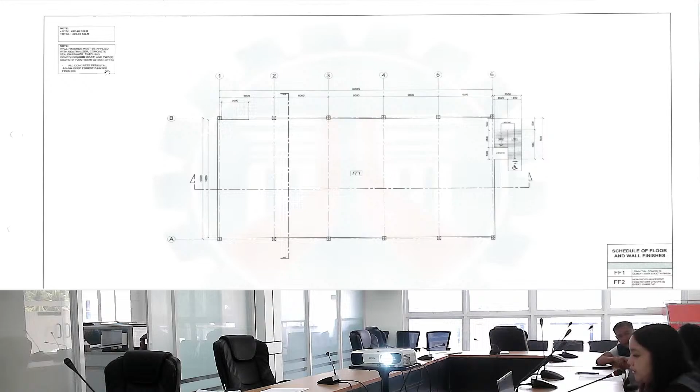Next, we have the front elevation and rear elevation. Next, we have the left or right side elevation, the sectional elevation through Y, as well as the details of girt and gutter. Next is the detail of gym and cover, 2 units, the sectional elevation through X, as well as the detail of louver. And for reference, we have 4 sets of heavy-duty plastic chair.

Next, we have the roof plan and the ramp detail. This is the isometric view for the ramp. Next is the plan elevation and section elevation for the ramp. Next is the general notes. Next, we have the foundation plan, the detail of wall footing, detail of base plate, and detail of F1C1.

Next, we have detail of girt, 2 units, beam layout. Next, we have the roof framing plan, the detail of strut, detail of girt 1, detail of sag rod, isometric view of rib type. Next is Tek screw spacing, roof panel side lap detail, the roofing fixer, detail of sway brace, overlapping and turnbuckle, the detail of splice for C-purlins and L-bars.

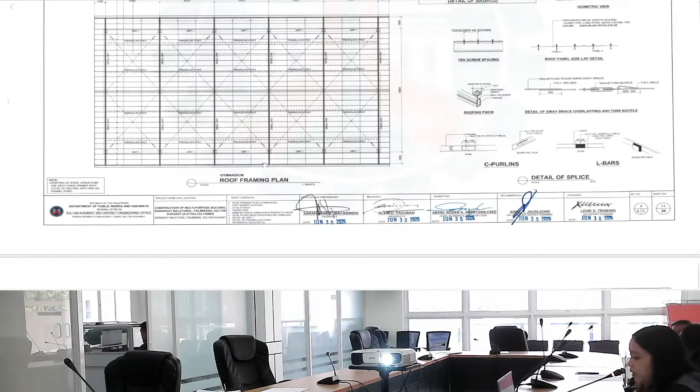Note, painting of steel structure: use gray oxide primer with catalyst before applying enamel paint. Next, we have the detail of truss assembly. We have 2 details: the detail of truss connector plate and detail of splice plate.

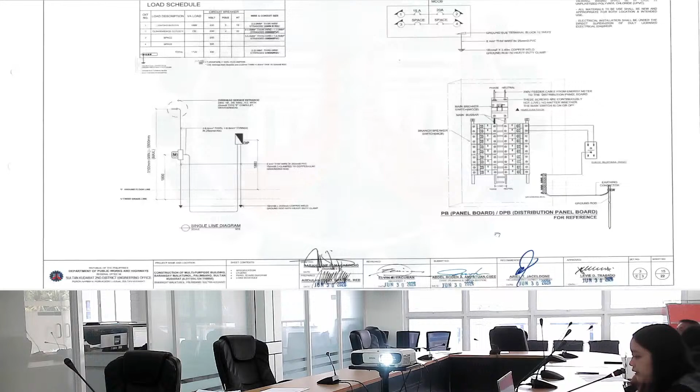Next, we have the lighting layout plan as well as its specification and legend for reference. The power layout plan and the wall mounting detail for receptacle, outlet for reference. Next, we have single line diagram, the load schedule for panel board, as well as the reference for panel board or distribution panel board.

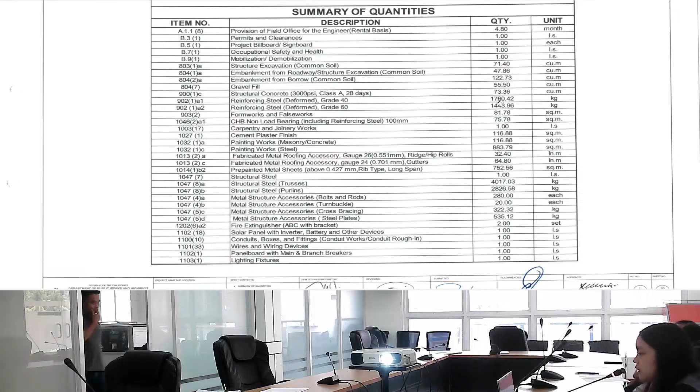For the summary of quantities: structure excavation, common soil, 71.40 cubic meters; embankment from roadway or structure excavation, common soil, 47.86 cubic meters; embankment from borrow for common soil, 122.73 cubic meters; gravel fill, 55.50 cubic meters; structural concrete 3000 psi, 73.36 cubic meters; reinforcing steel grade 40, 1760.42 kilograms; reinforcing steel grade 60.

1443.96 kilograms; formworks and falseworks, 81.78 square meters; CHB non-load bearing 100 millimeters, 75.78 square meters; carpentry and joinery works, 1 lump sum; cement plaster finish, 116.88 square meters; painting works for masonry or concrete, 116.88 square meters; painting works for steel, 883.79 square meters; for ridge or hip rolls, 32.40 linear meter; for gutters, 64.80 linear meter.

For pre-painted metal sheets, rib type, 752.56 square meters; structural steel, 1 lump sum. For trusses, we have 4,017.03 kilograms. For purlins, we have 2,826.58 kilograms. For bolts and rods, we have 280 each. For turnbuckle, 20 each. Cross bracing, 322.32 kilograms. For steel plates, we have 535.12 kilograms.

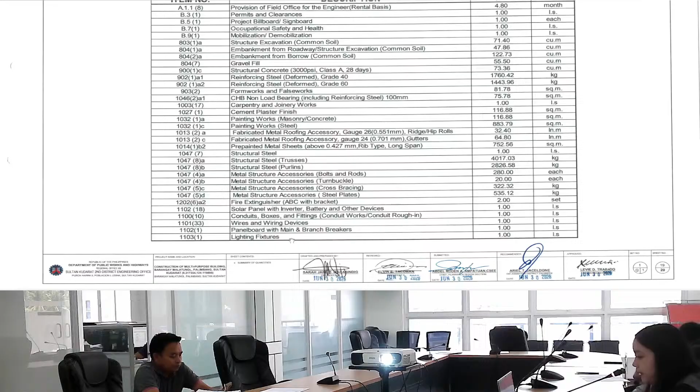Fire extinguisher, 2 sets. Solar panel with inverter, battery, and other devices, 1 lump sum. Conduits, boxes, and fittings, 1 lump sum. Wires and wiring devices, 1 lump sum. Panel board with main and branch breakers, 1 lump sum. Lighting fixtures, 1 lump sum.

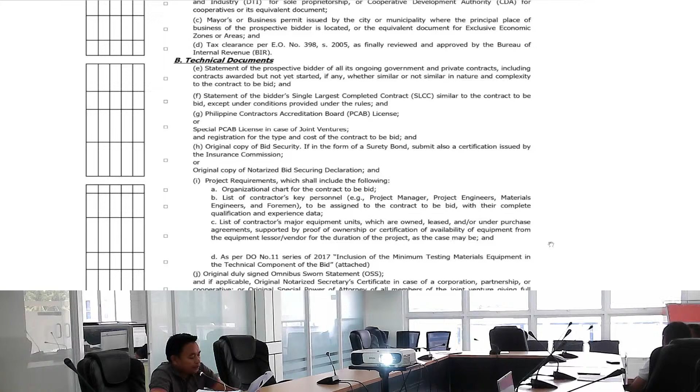Next is the statement of the bidder's single largest completed contract, the SLCC, similar to the contract to be bid except under condition provided under the rules. And of course, the PCAB license or special PCAB license in case of joint ventures.

And then the original copy of bid security, or copy of notarized bid securing declaration.

Another thing is the project requirements, which shall include the following: organizational chart of the contract to be bid, list of contractor's key personnel like the project manager, project engineers, materials engineers, and foreman. Make sure that these key personnel are validated in the CWA.

The list of contractor's major equipment units, which are owned, leased, or under purchase agreements, supported by proof of ownership or certificate of availability of equipment from the equipment lessor vendor for the duration of the entire project.

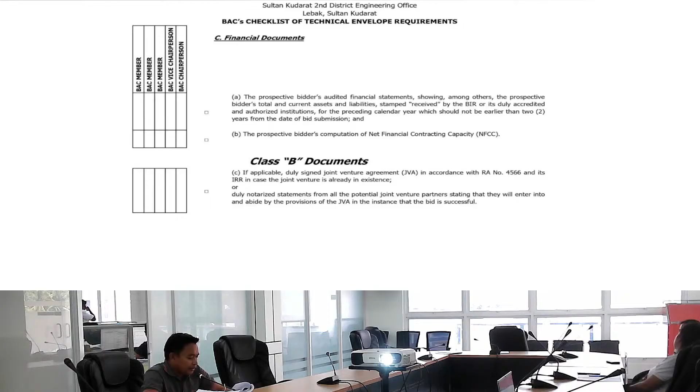So those were the documents that shall be included in your financial and technical components.

So let's now proceed to the next agenda, which is the criteria and procedure for eligibility check, preliminary examination of bids, detailed evaluation of bids, post-qualification, and award.

So this office is using two methods for the procedure of eligibility check. One is the electronic eligibility processing, and the other is the presence or absence of documents, or the non-discretionary pass-fail criteria.

The electronic eligibility is performed in the CWA, or the Civil Works Application, but before the eligibility processing, we are conducting the contract profiling, which usually occurs during the first day of publication. During this contract profiling, we are going to input the basic contract data like the contract ID, the ABC, the contract duration, major work category, and etc.